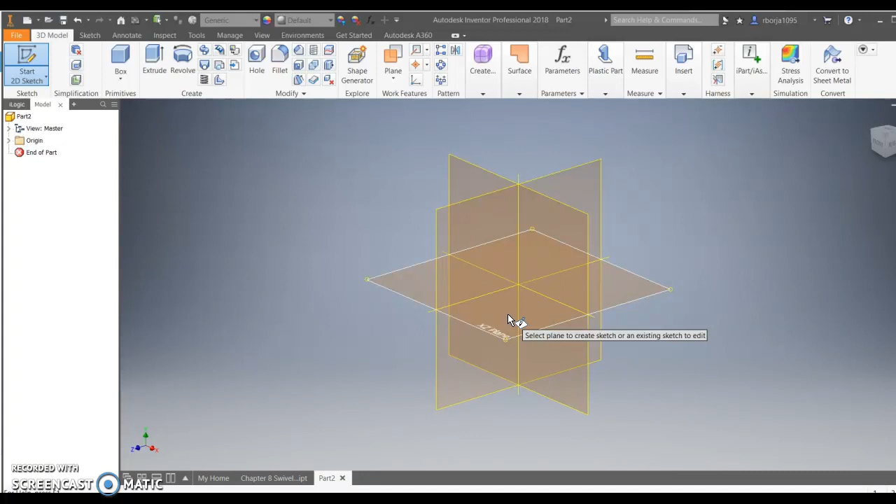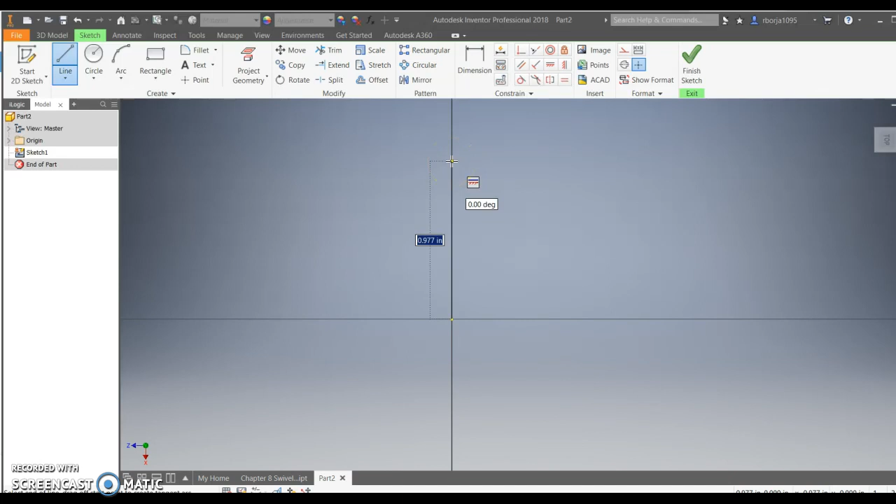Alright, today we're going to draw the shaft guide in Inventor, and we'll start with the first layer. I'll draw on the XZ plane, and the overall length is 3.5, but we'll make the 2 first, that's from circle to circle.

Then we'll make the circles, which is 1.5 in diameter, and then a 1 diameter circle. Okay, and then from the middle, this line to the circles on the outside, the small circles on the side, 1, and then circle. First one's going to be 0.25 diameter. The next one is the outer circle, which has a diameter of 0.5, and then same here, 0.5.

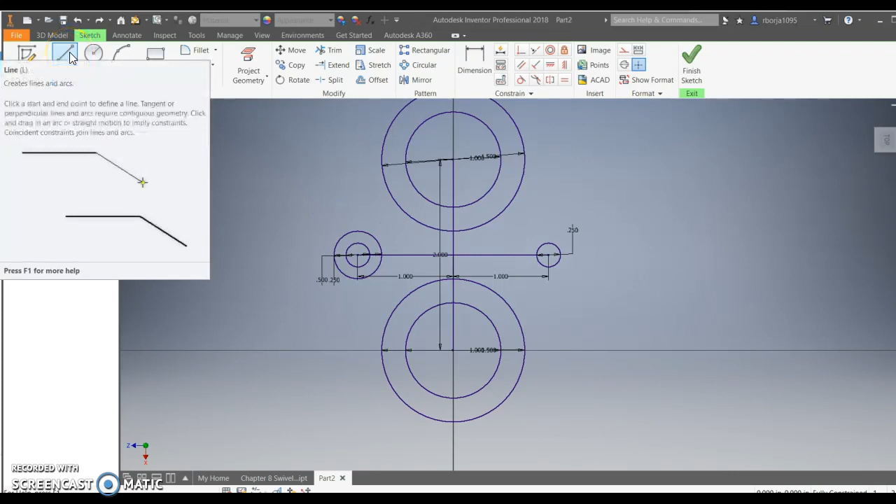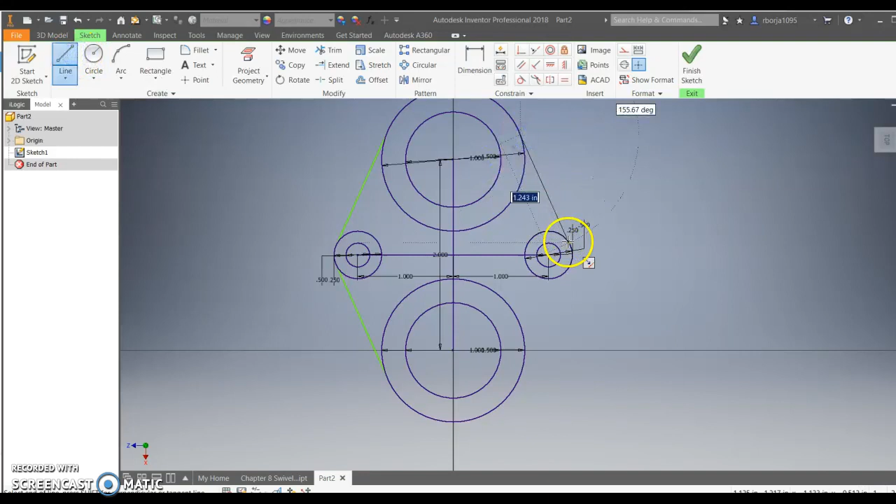Okay, now we make a line from here to here, and then from here to here. Oh, we didn't make that outer circle. Okay, so 0.5. A line from here to here, from here to here, and then we're going to constrain it.

We want to make it tangent to this circle, tangent from this to this, tangent from this to this, and tangent from here to here, to here, to here, here, here, here, here.

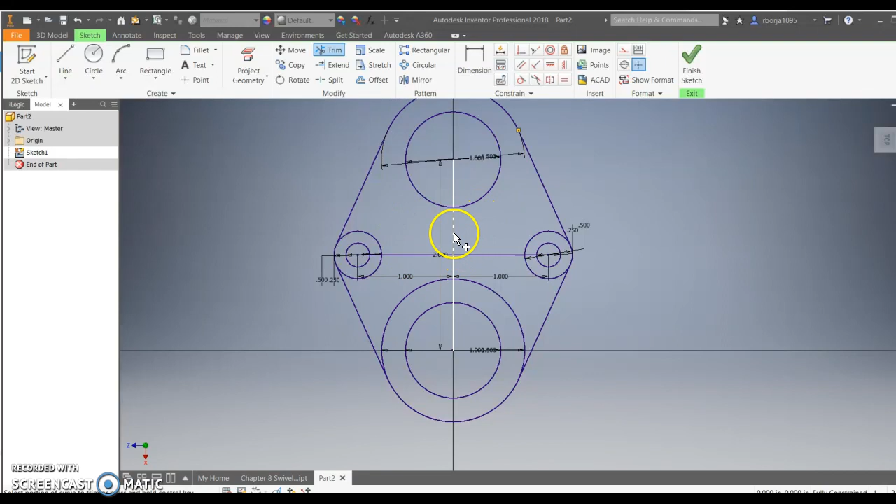Perfect. Now trim. Oh, delete this middle line. Trim. Delete this line. Delete, and then trim. And then actually trim those circles too. Delete. Finish sketch.

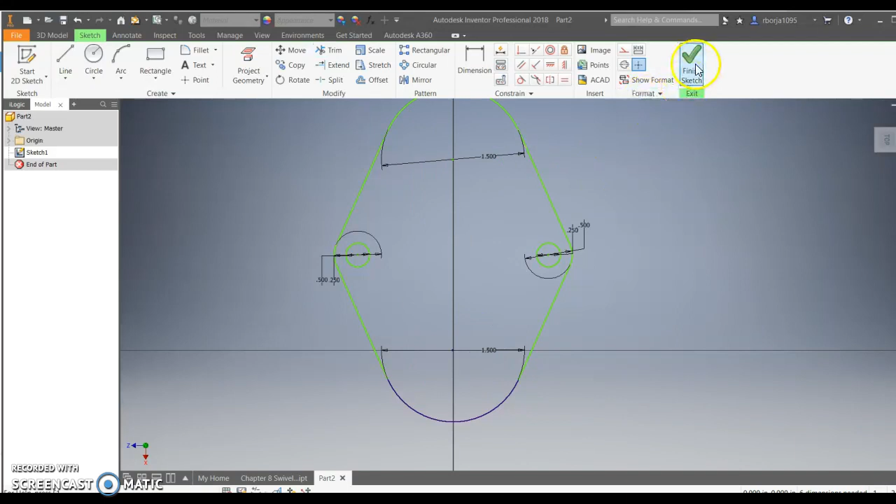And we're going to extrude. And we're going to do the first layer, the first height, which is 0.25.

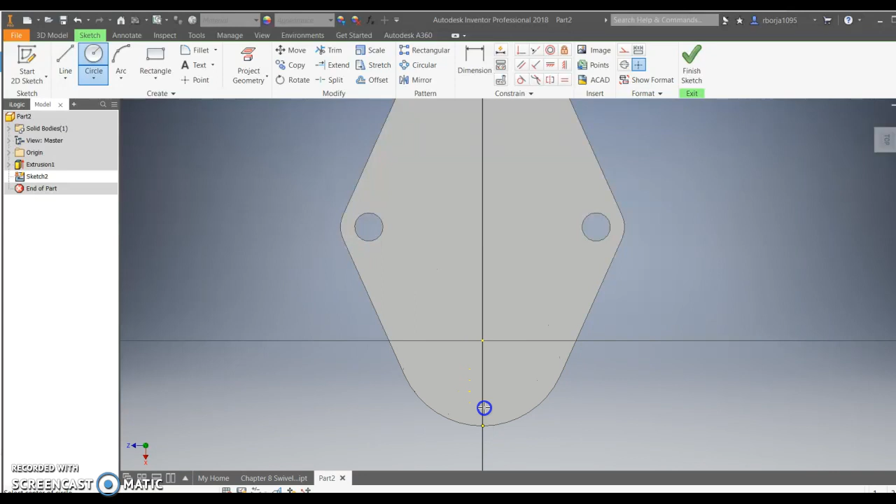Perfect. Now we're going to make the other layer. So we're going to sketch on here. I'm going to go circle, here, and then here. The point is not given, but you can move around here, and that will give you the points. Then you finish, then you make it extrude.

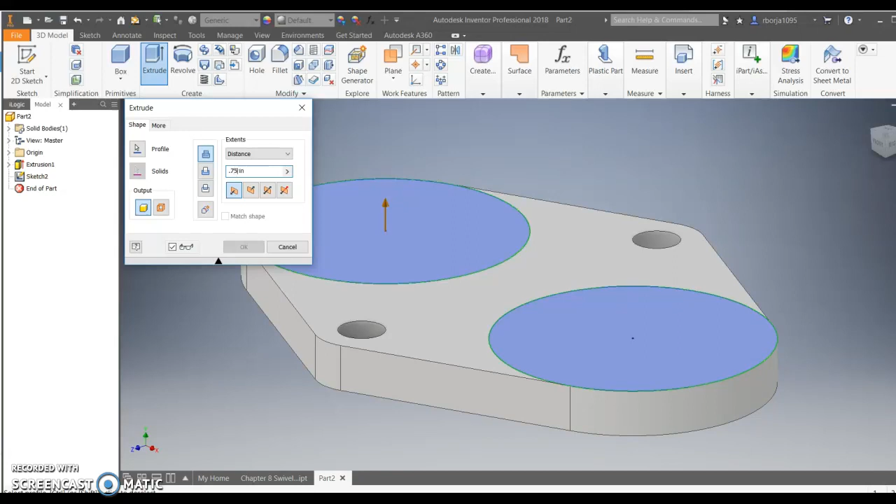And then it's 0.75 because the overall height is 1, but we made the first layer, which is 0.25, so minus equals 0.75. Okay, now we make the middle part.

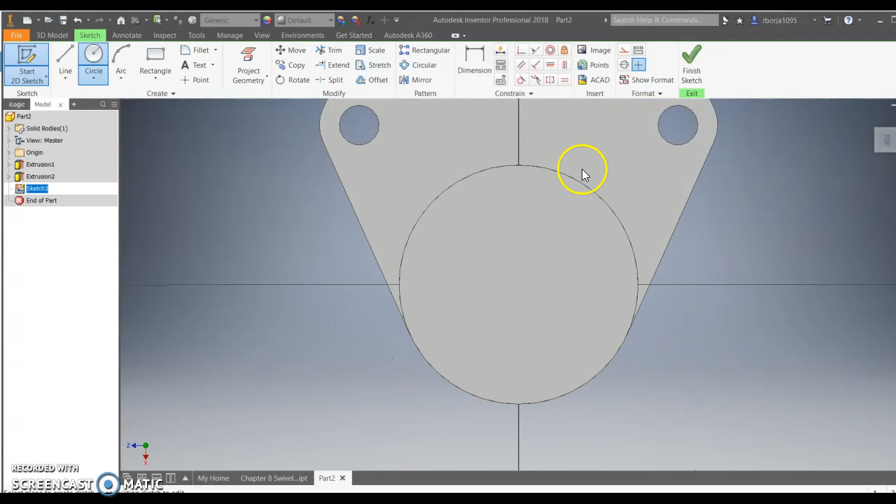And to do the middle part, we'll start sketch, and we'll press here, and then same as before, we'll make a line from there to there, and then the same on this, from here to here, and then we'll make circles.

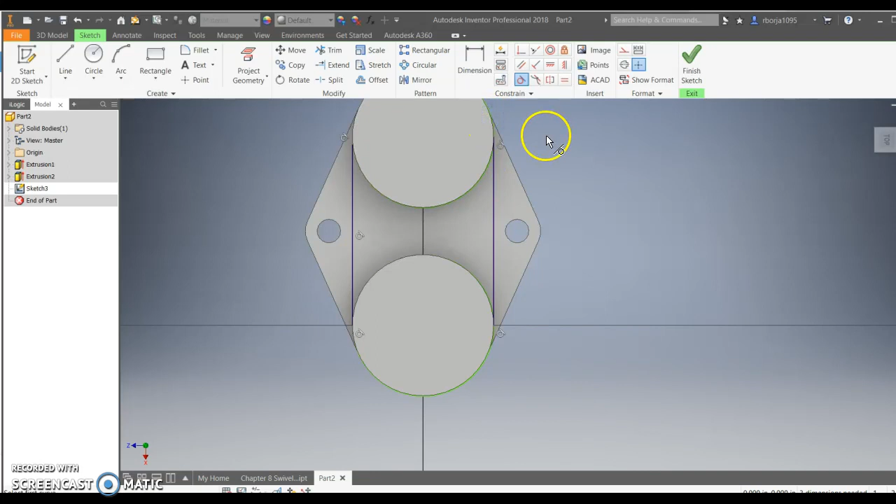Try to find the middle point again. Perfect. Yep. Middle point. Yep. Okay, now constrain from here, and then from there to here, and then from here to this circle, and then here, and then trim, and then you want to trim.

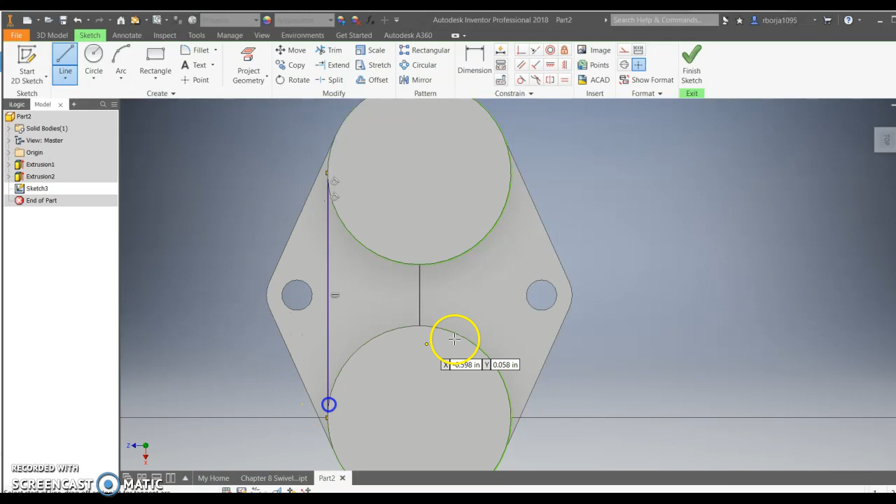Oh, what's going on? Oh, I didn't touch it. So delete, we'll do this again. So from here, there, there, there, and then tangents of this. Oh, it already is.

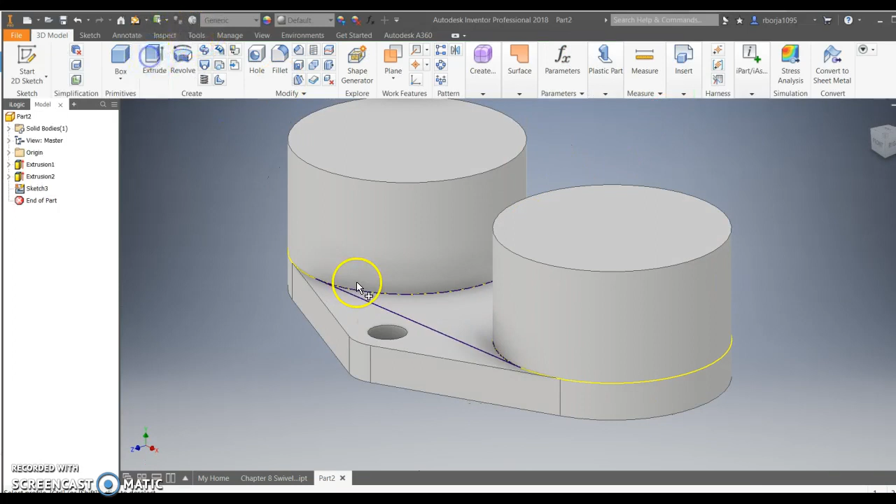So now you'll just trim it. Trim the outside of here. Trim, finish, extrude, and then you want to extrude it to 0.25, and then you have the middle.

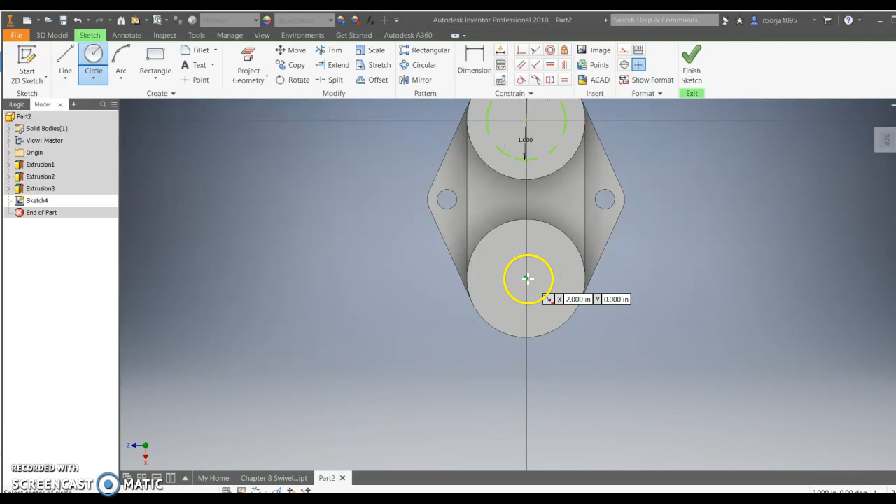Perfect. Now we have to do the top, the last top. So start sketch, select the holes, circle, and then select the middle, which is 1, and here it's 1. Finish sketch, extrude, select, then go to here and all.

And then we'll cut through the bottom, and there it is. Here is the final part. This is the shaft guide in Autodesk Inventor.

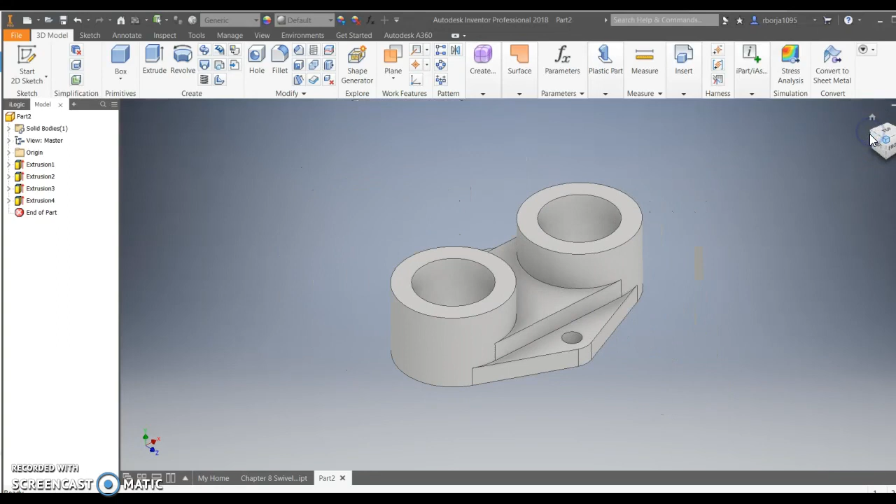We can look around here. Yep, yep, yep. Okay, so I'll do it, and then yeah. So this is the shaft guide.